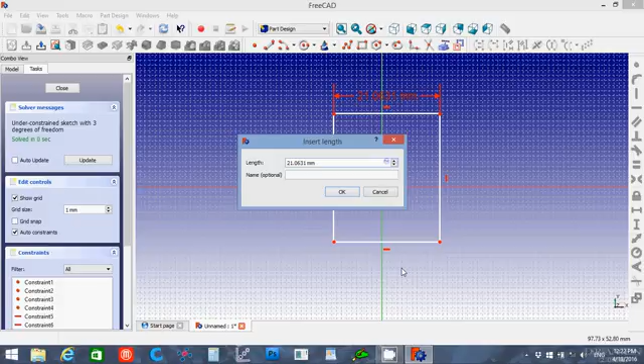So once it's yellow, you can click on it, and we're going to use this over here, the constraint for the horizontal distance, and we're going to change that. I gotta make sure my num lock's on, and change that to 100. And I'll zoom out. And then we're going to click on the side one, click this, and change that to 100.

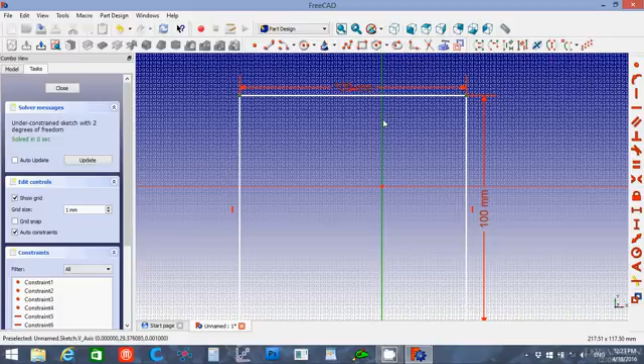And then what we're going to do is we're going to click the node point, press Control, click the other node point, and then holding control still, click the y-axis, and then we want to use the Symmetry Constraint, which will put it right in the middle. And do the same thing here, click the bottom node, hold Control, click the top node, and then holding control still, click the x-axis and press the constraint. That will make a fully constrained sketch.

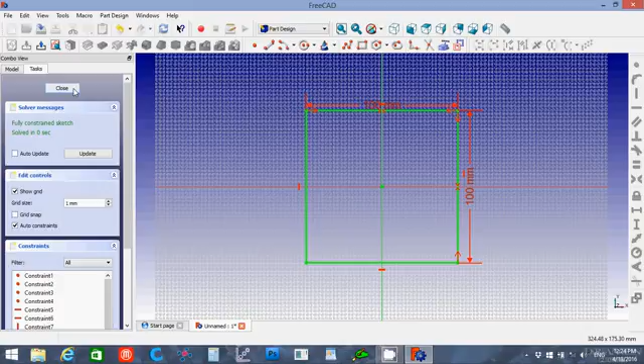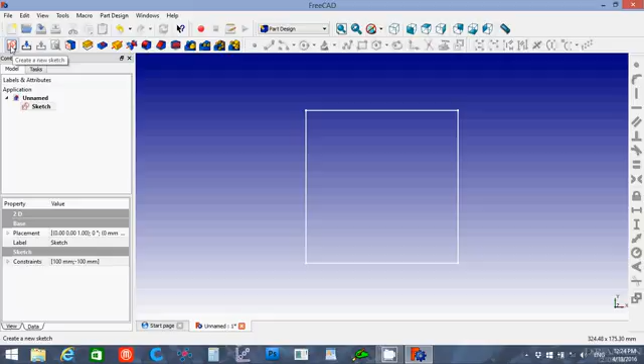And then so I like to switch to the model because then I can see the objects that are in it. And then we're going to do another sketch. This is where we're going to actually make it. Now we're going to do XY again. And we're going to zoom in a bit. And we're going to start off with 5 circles. First circle, you want to make sure you put it on the origin and on the Y, and click there. So basically, you're setting the middle point and then setting a radius to them.

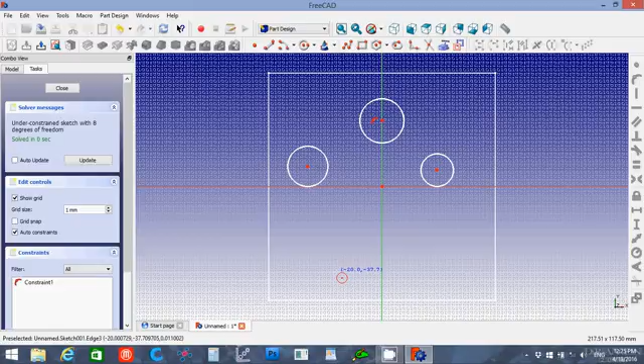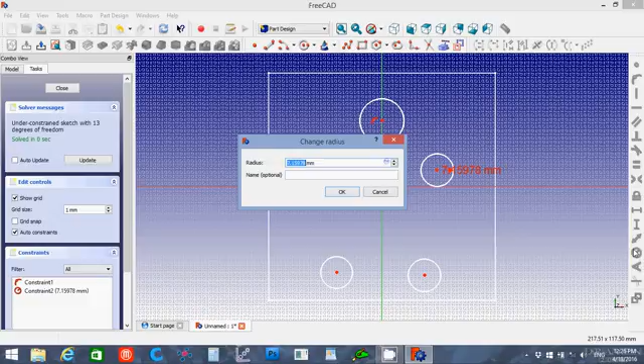Okay, hit escape, and we're going to set the radius on all of these. For those who might not know, diameter is the measurement from one point to the opposite point in a circle, fully across. That's the diameter. Radius is half of that, so FreeCAD uses the radius number. I'm going to set the radius constraint by clicking this little circle, change the number to 8, and say OK. I'll do that to all 4 of these.

And then I'm going to select this one, the head, and it's going to be bigger. I'm going to set that one to 10.

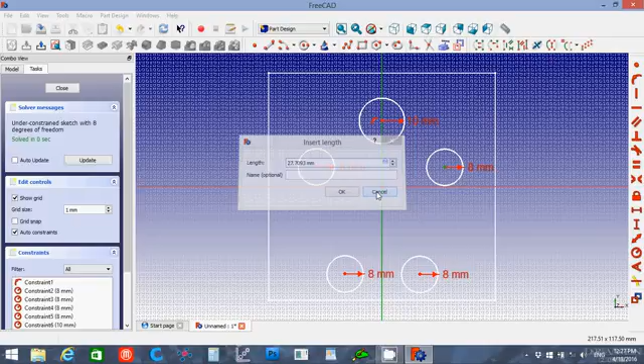Now, what you can do if you wanted is make these very precise positions, but I'm not going to do that right now. What you could do is click the center, click this, and set a distance, and set a distance from each axis, so you had your circle in a very precise spot. But because this is just a gingerbread man and we don't really need it to be super precise, I'm not going to do that.

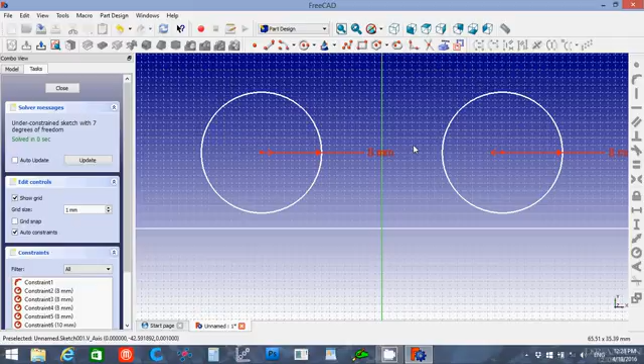But we could zoom in, move down, bring it so it's about 2 millimeters. Now what you could do is click, control, click, click, and make a symmetry. That way those are both the same distance away from the y-axis. Then we'll do the same thing here, so that it's symmetric.

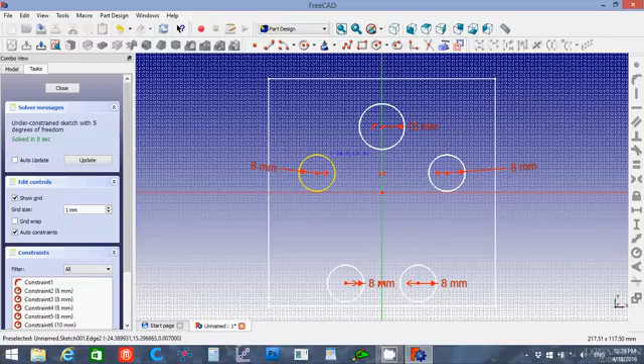Now we're going to use this multi-line tool. You want to make sure that the circle is yellow before you click, which means it's pre-selected. This will anchor the line directly to the circle where you click. Then when you're done with the line, hit escape so it doesn't create another section. And we'll do the same thing.

Now the reason I'm not going to click directly into merging it with the y-axis here is if you anchor it to that, then say I want to fillet that to make it rounder, it won't fillet that part of it. So I'm going to make it 3 lines here.

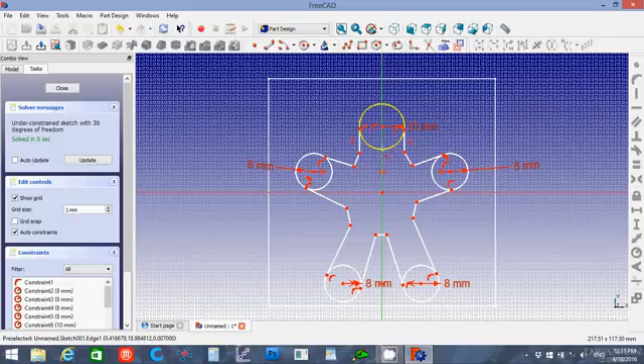So now we've got sort of a man shape, but we don't want the inner lines of the circle. So we click this one here, called the trim tool, and then we click on it. If everything's anchored right, this will work like magic. And it did. Now I'm going to hit escape to get out of the trim tool.

Now if you want, you can move parts of this, and move with what you want. Because we used this symmetry tool, you're manipulating both sides at the same time. As long as everything is connected right, you want to make sure every line is connected right, then you should be able to manipulate this. I'm going to add some fillets in here, which are just sort of a rounding.

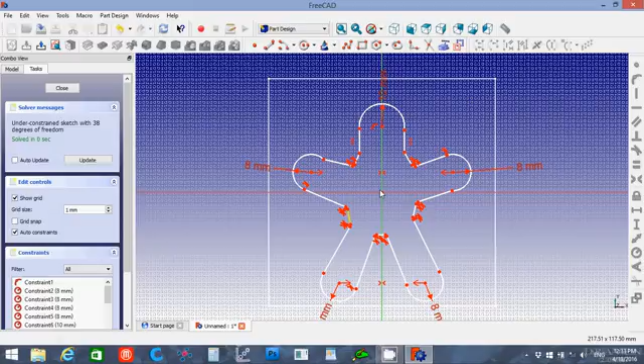You want to click on the corner edges. And then hit escape. Zoom in a little.

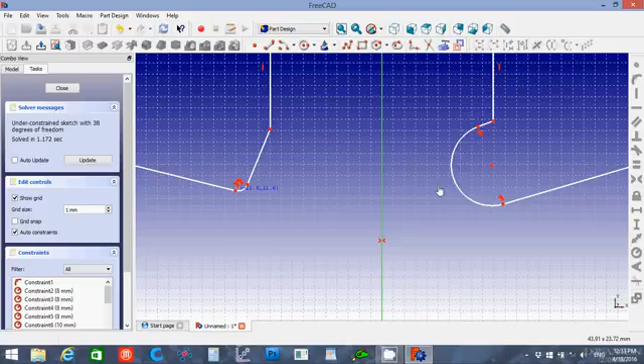Sorry about this. This is my computer getting slow and not doing what I'm asking it to do when I'm trying to do it.

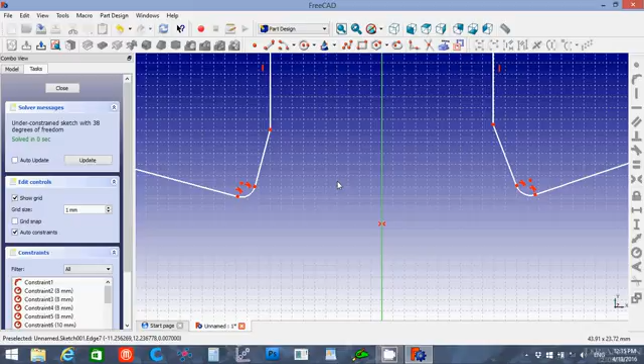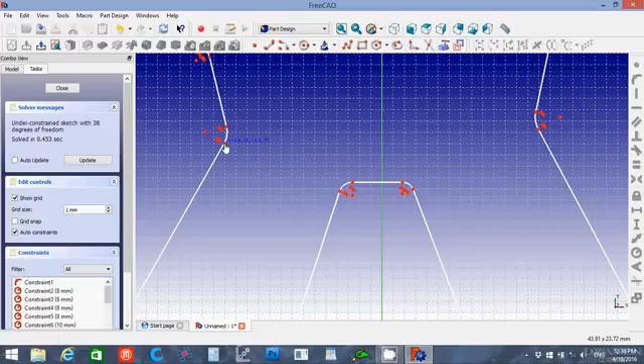I'm going to move these around. I want them to look more natural. See how they're sort of the edges hitting and then the circles around? I want to make sure that they don't look like the edge.

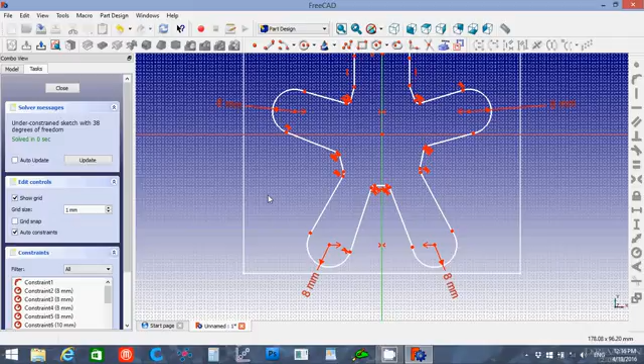It should look like the edge blends directly into the circle rather than it having a separation. See how this one has, you can see it comes over and then the circle's coming out of it? You bring this over a little so that it looks like one continuous shape, not just bumping in with the circle outside of it. It should look like it's even with it.

Oops, and I messed that one up.

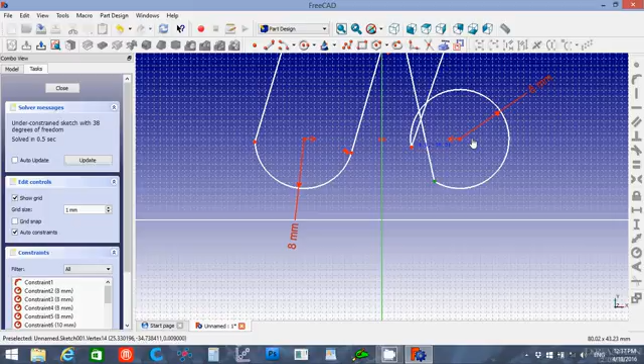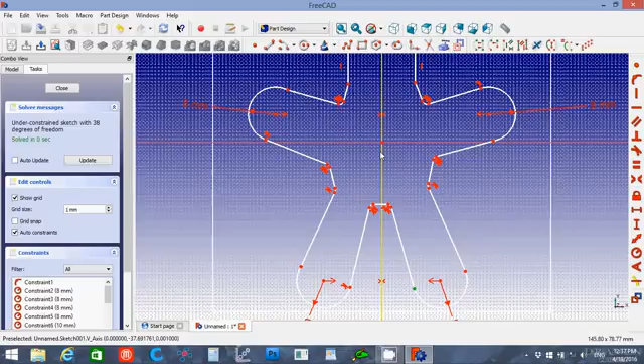Sorry, this is slower than I am. So once you've got it so it looks like it's where you want it. The reason I made the top circle down so far, and I might drag it down a little bit more, is because I'm going to later add a loop here, part of the pendant part of it. So we're going to close that.

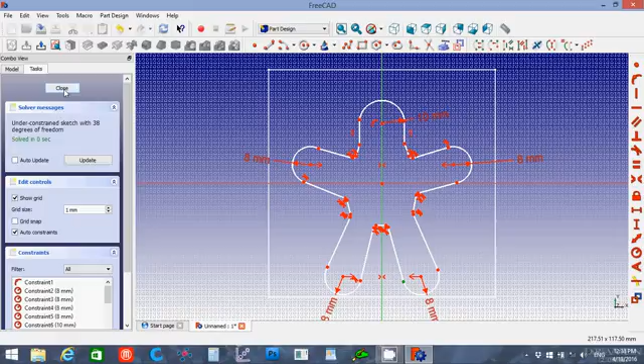What I want to do is copy - Control C, Control V will copy the sketch. We're going to use the second sketch later. So click on the first sketch, and we're going to pad that, and we're going to put 3 millimeters. We're going to say OK.

Then we're going to take the second sketch, and we're going to move it up by changing its Z position. We're going to put it at 3 millimeters. And then we're going to edit that by double clicking into it. You might have to click out into space first and then double click it.

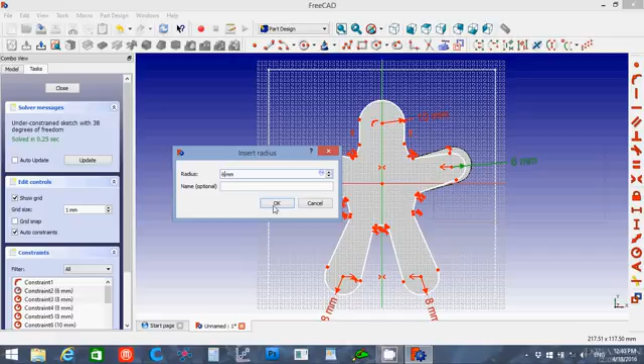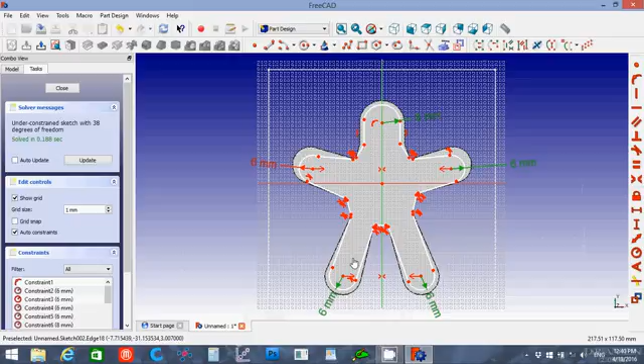So what we're going to do first here is we want to double click on the radiuses of the circle parts and change them by subtracting 2, so 8 becomes 6, 10 becomes 8. And then we're going to manually try to adjust so that we're about even.

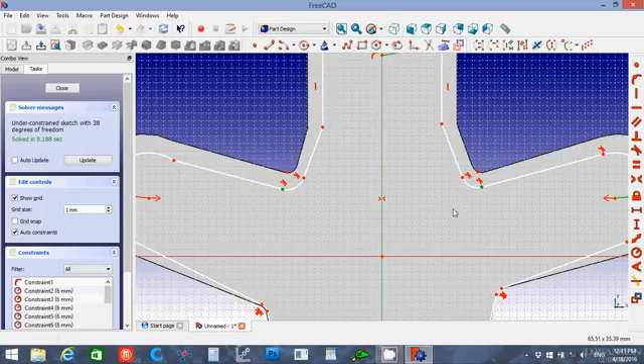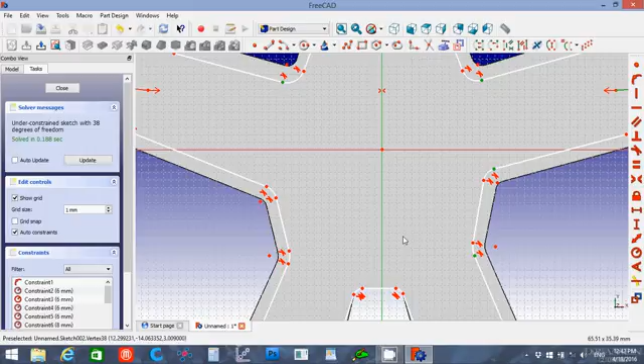So now we're going to zoom in, and we have to try to manually adjust. We're just moving this out so it's almost equal distance from the original.

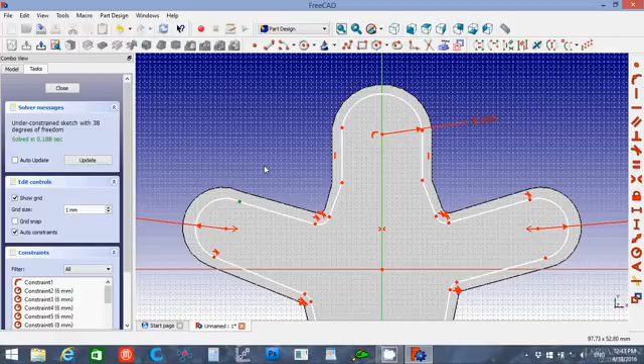Okay, so now we're about even all the way around. Clicking the zoom all - that's what that button is. And we're pretty good there, so I'm going to say close.

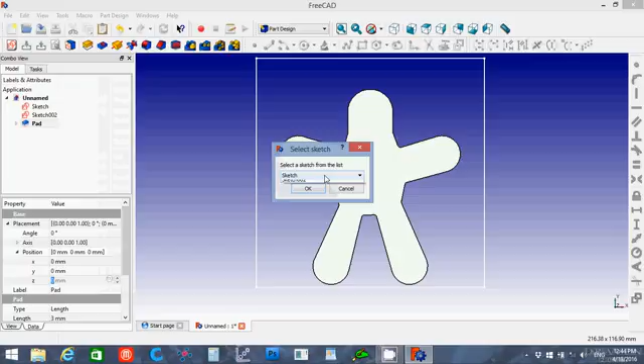Now what we're going to do is click on the pad face to select it, and then we're going up to Part Design, and we see Map Sketch to Face. We want to select from the drop down Sketch 002. This should open that back up again. We'll say close. Now what that did, because all we did is copy the original sketch, is it placed this new sketch directly onto the face of the pad, this item here.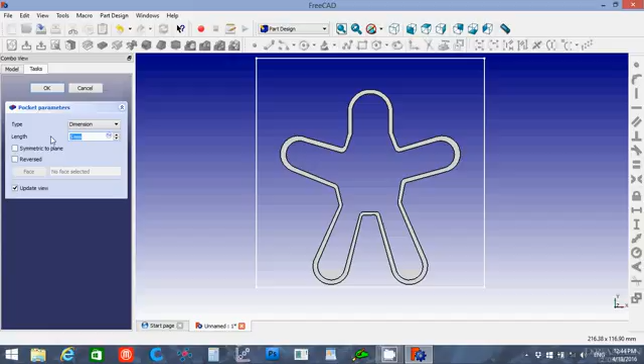What we're going to do is click Sketch 002, and then we're going to use pocket. We don't want it to pocket all the way through, so what we're going to type is 1.5, and say OK.

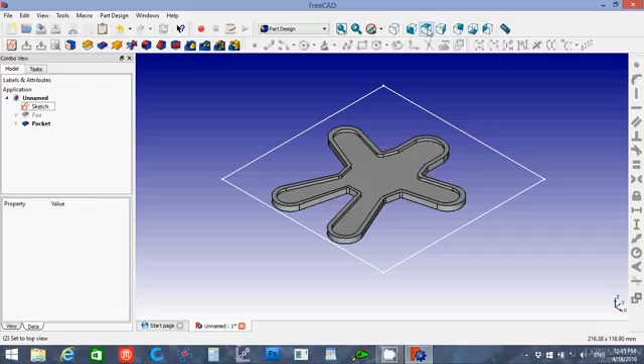Alright, so now if you want to, you can look at it, and it's a flat piece with an outer rim. What we're going to do is switch back up to the top view. We're going to click in here, and we're going to say New Sketch. Now, when you select the face like this, when I click that, this interface, and you click this, it will now map the sketch directly to the item itself.

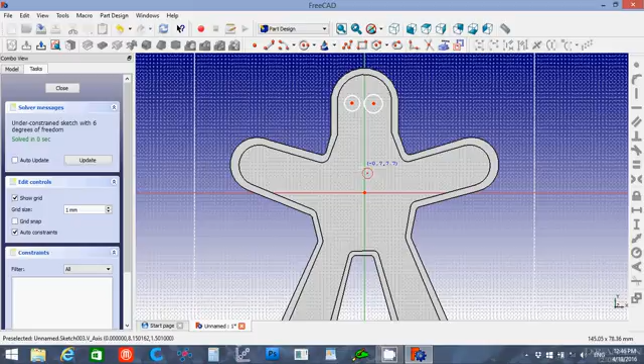And now we get to do some of the fun part. Now we can give our guy, our Gingerbread Man, some eyes. We'll probably give him some buttons.

We'll change the radius so we can move him around. Escape. And set the radius on that - we're saying, let's say 2.

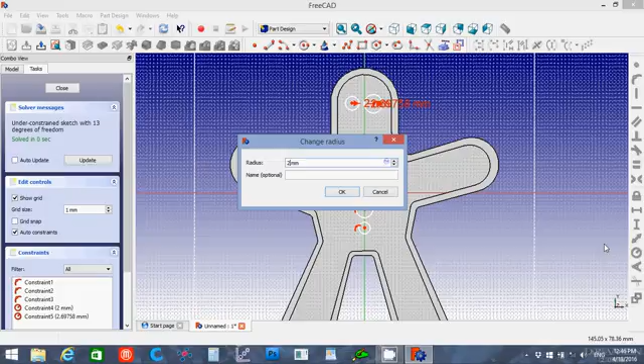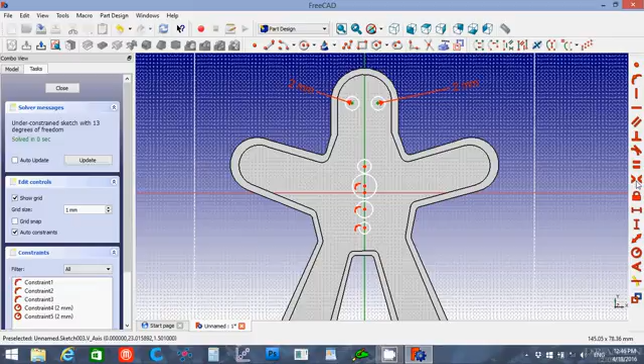Click it and move it out. You can click these and move them so that they're not right in your way. And I'm going to make those symmetrical to the Y. And these, let's just make them all 2.

Now, if you find like this one, I didn't get it pinned to the Y. What you can do is you can click the middle center point, and then you can control click the Y, and you can pin it there yourself, like that. That tool there creates this constraint that will connect it to it.

Okay, and I'm just gonna try to spread these out a little bit. Okay, and let's see.

One way, if you wanted to make another circle, or you wanted to make this simpler, you can select an item, go Control C for copy. Now see how this has this little, you'll see a little line - let's see if I zoom in. You'll see a line coming up. So where you want to put the item, click.

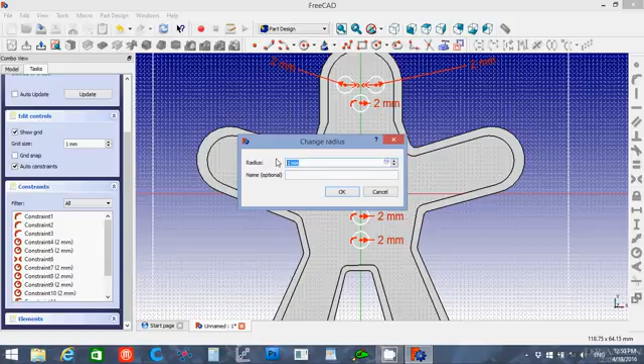That constraint, so change that - you can click on any constraint in the window, or you can select them from this list. Can get to that, and then I'll change this so it's smaller. Say just 1 millimeter, and then maybe 1.5. That way it's smaller than the eyes, nose.

And then we're going to draw him a mouth. Now, depends on what you want to do - you can make it smiley, you can make him angry, you can make him whatever. I'm going to go with smile. And I'm going to use the endpoints and rim point instead of the regular arc. This way I have a little more control over the positioning of it.

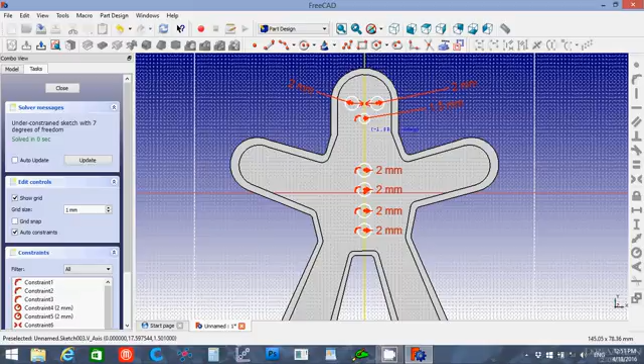You click, drag over, click, and then something happened there. Let's try that again. Click, click. Okay, now you can see the line. What's going on?

I was creating a constraint, but now I have my line back. Yay, okay.

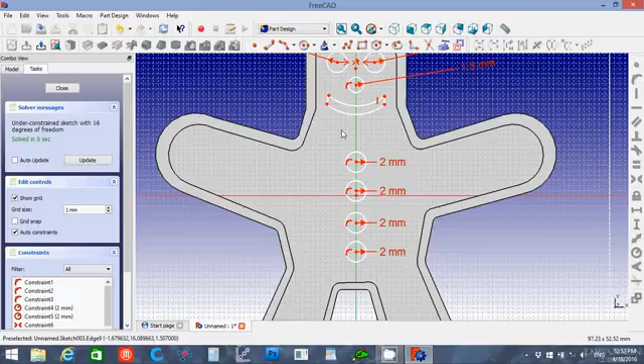Do the same thing. Okay, and then what we can do is connect these. It's a single line. As long as it's completely connected, you should be okay. You might want to try to get around or move a little bit.

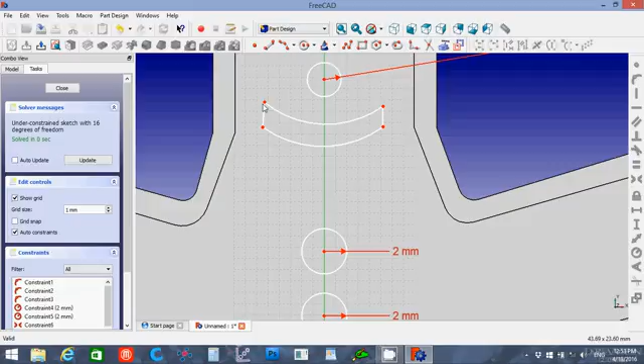Now what I'm going to do is give him some fingers, and I'll use the ellipse tool. So what we do is we go up here, click, then we draw on one of these, and I'm going to do a Control-C, Control-V on this, and move it down.

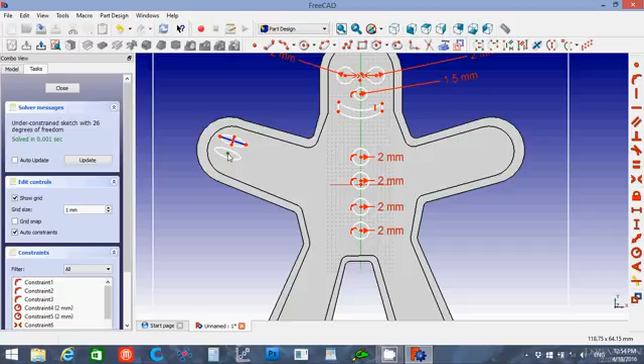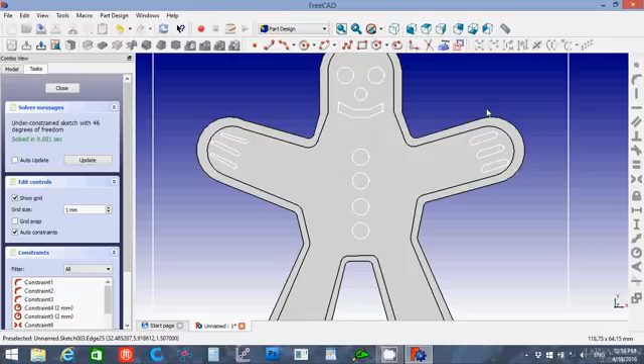Control-C. So we don't have the same points, it won't allow me to. Well, I'm trying to do a shortcut to just copy this, see if I have enough control over where it ends up. Okay, maybe that will work. And we'll try to do it again here. Oops. Sorry, if you escape too many times, you end up closing it.

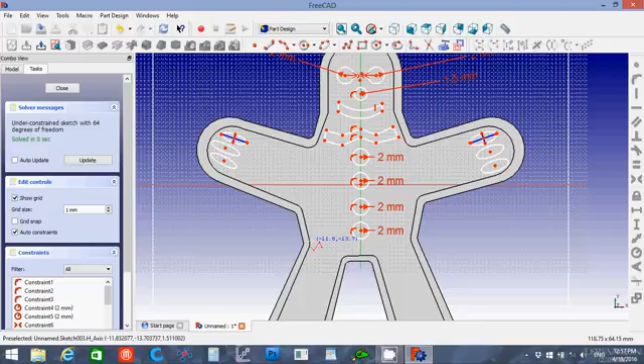Okay, so we've got our hands, and what I'm going to do is use the multi-line tool. Give him like he's got a collar on his shirt. And give him also one for...

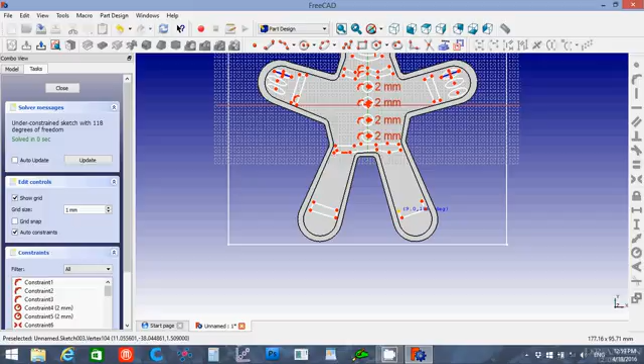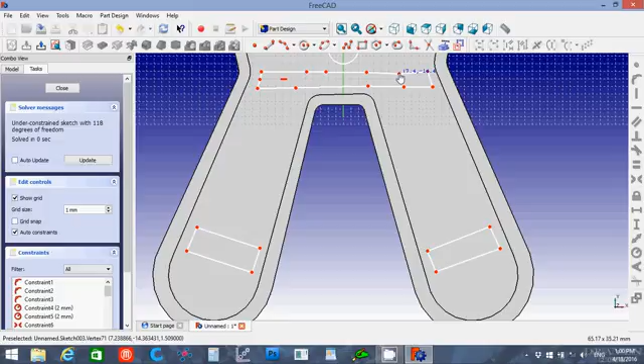Biggest point is to make sure that everything is connected. As long as all the parts are connected, then we should be able to do the pad for this without any trouble.

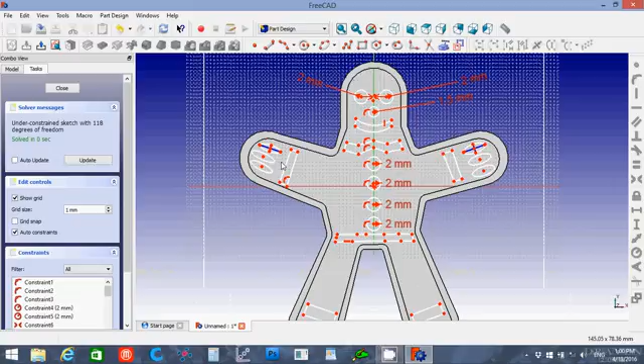That looked good. I mean, you can do whatever you want as far as the shapes and sizing to make it look like a gingerbread man. And I'm going to click close.

Wow, what happened? The left finger suddenly went really small. I don't know why.

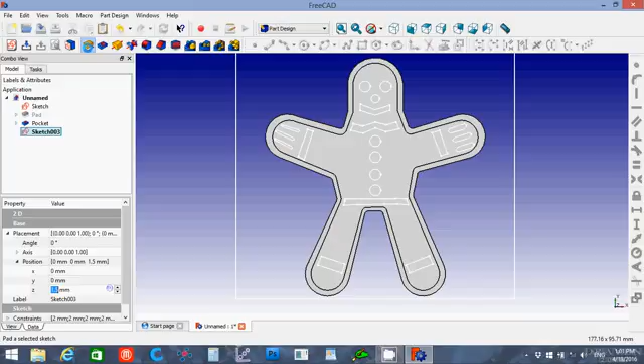Well, we're going to just pad that, and we're going to go 1.5. And say okay.

Come on, computer. I know you're doing video too, but hurry up.

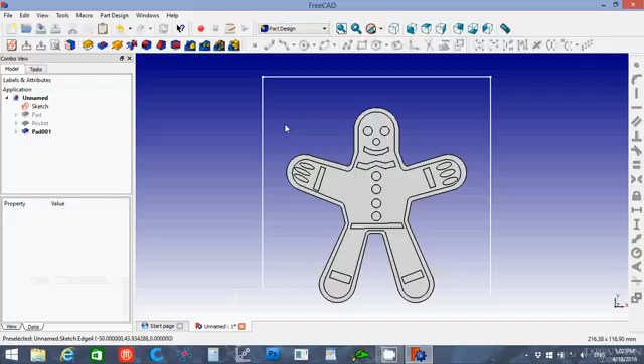Okay, and now what we're going to do, click on, want to zoom in on the top of this head. Click on the edge here and create a sketch. And we're going to create two circles.

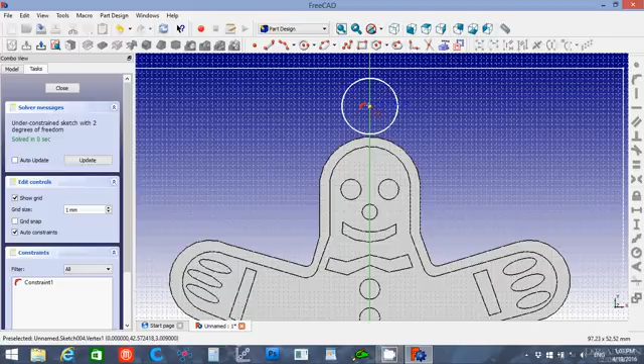One circle we want - now see here, I'm going a little too far, so I might have to make it smaller because I was hitting the edge up here. And then bring this so that it's coming just inside that top part. And then we're going to click another circle, using the same point so that you're pre-selecting the same center. Click and then out to about there.

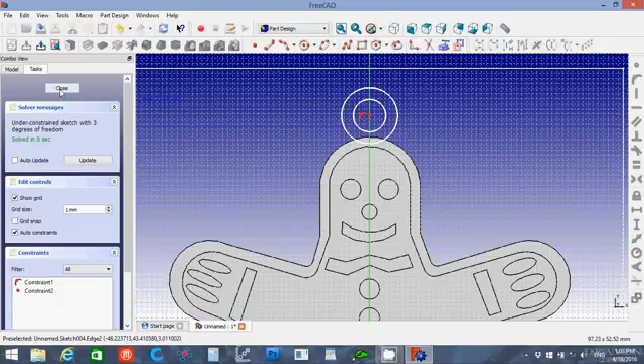Now what this will be doing is creating a ring on the top of it. And we'll click close. And then what we're going to do is click that sketch, then click pad.

And then we're going to use what's called a reverse pad, so that it goes the opposite - so it's going down instead of up - and then we're going to say 3. I'm going to say OK. Now that creates the ring on top.

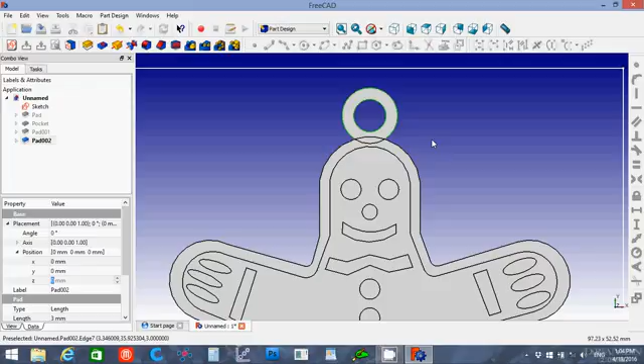And what we're going to do is click on the inner side ring, press Control, click the other sections - it's not into the gingerbread man. Okay, so you selected everything other than that, and then we're going to flip it around to the bottom view. Press Control, still click that, click that, and then we're going to use the Fillet tool.

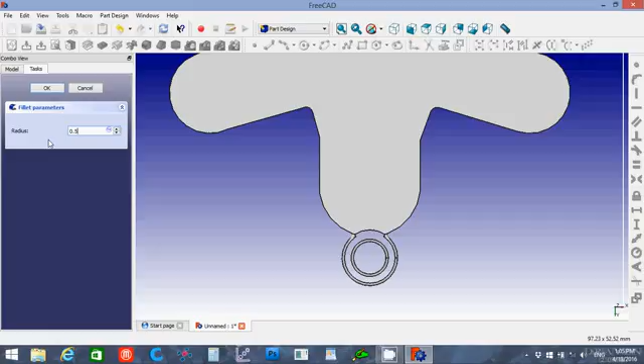And well, we want to change this down, I think, to 0.5. Well, not good. Okay, how about 0.25? Still not. Okay, we're not going to be able to fillet that at all, sorry.

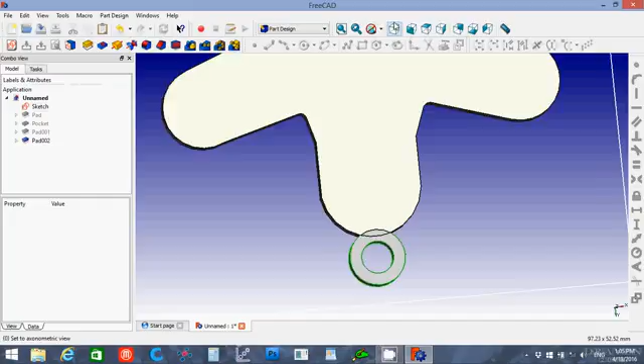Okay, so I guess he's not going to play nice with that part. And we're going to go File, Save, and this one - I'll just put it here for now. We're going to call it Gingerbread Pendant.

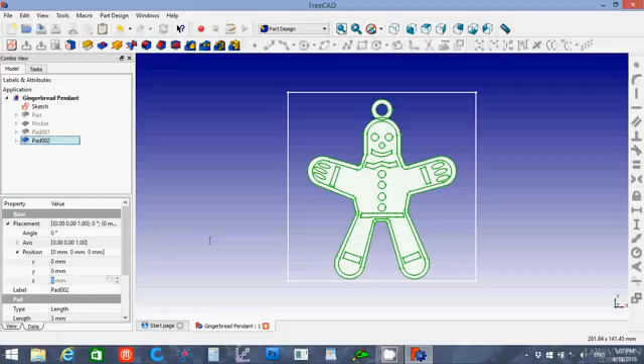And then you're going to take the pad, File, Export - there's the STL, Gingerbread Pendant. Now all I did is select the pad. The sketch, like I said, it's not going to be part of the project. That was just a guide - it's the virtual bit. And we can close that.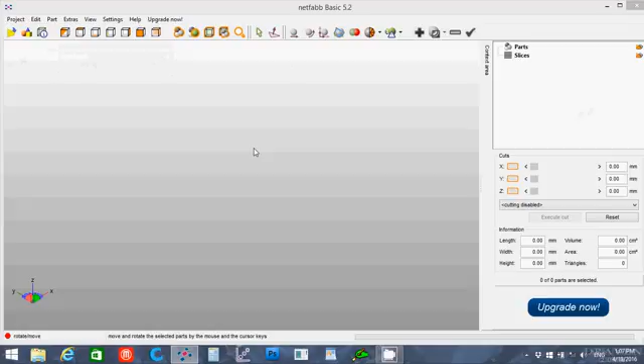Now, I always run my stuff through netfabb Basic because sometimes FreeCAD's not perfect and you want to make sure that it's going to be printable. So I'll save it later. Part, and I gotta go find it - my 3D printing projects, STLs, Gingerbread Pendant, open. And since there's no big red exclamation mark triangle over here, it means that this should be fine to go to print on the 3D printer.

Now, when I'm printing this, what I'll do is set it so that at Z height it'll pause at 2 millimeters. And then I can change the filament, so I can print the back as one color, like a brownish or tan color, and then I can print the top as white or blue or red or whatever I want. So I can have a 2-color print based on this. That's why I did the 1.5 millimeter.

So that what happens is it gets up to 2, and then there's 1 millimeter still that can be the other different color. Thank you for watching. Bye.